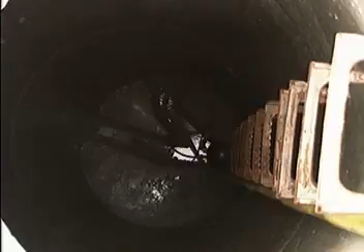Unfortunately, they failed to take the time to safely inflate it. Instead, they used a trailer-mounted 175 CFM 200 psi air compressor, but failed to regulate the air pressure. Manuel was sent into the line and held the plug in place while air was pumped in from above using the unregulated air source. The first inflation didn't stop the sewer flow. Manuel asked for another shot of air. Boom! The plug exploded in his face.

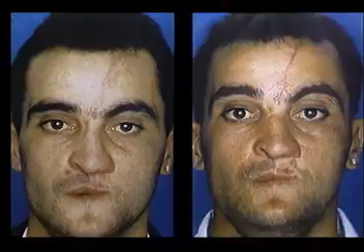Now, the photos you're about to see are graphic, but depict the pain and suffering that can result from misuse of a plug. 13 operations and 8 years later, Manuel's scars are still very prominent. Had Manuel simply used a regulated air source, or better yet, blocked the plug and inflated it from street level using an inflation hose, he never would have been injured. Manuel's life has changed forever. I guess you could say he was one of the lucky ones.

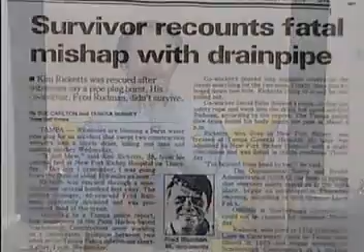He's still alive. Unlike the contractor in Tampa, Florida, who was using two 42-inch plugs to isolate pipe between two retaining ponds. To put the line back in service after the pipe was repaired, the contractor put on a snorkel and dove 3 feet to open the plug's bypass. But the plug deflated and sucked him into the pipe, drowning him. He made the fatal mistake of placing himself in the danger zone while the plug was in use.

These tragic accidents were 100% avoidable. Proper usage and understanding of equipment and job conditions are vital to your safety. Safety should always be your first concern on any job site. During the past decade, our industry has learned that many accidents can be avoided. For example, by properly shoring a trench on a job site or taking the necessary precautions for confined space entry, you can make the workplace safer.

OSHA, the Occupational Safety and Health Administration, and NUCA, the National Utility Contractors Association, have specific guidelines for shoring a ditch, monitoring atmosphere, and using confined space equipment. But what about the safe use of pipe plugs and sewer testing equipment? There are no government or industry regulations in this area. That's why, as an industry leader, Cherne Industries is heading a campaign for greater education, awareness, and safety.

Cherne sets the standard for high-quality, reliable pipe plugs. And although these products are built with safety in mind, they're only as safe as the person using them. In order to practice safe plug usage at all times, it's essential pipe plug users take the time to learn the proper procedures. Workers depend on supervisors to communicate the dangers of using a plug, and on manufacturers to design and produce safe equipment. When renting equipment, it's the responsibility of the distributor to supply defect-free products that are in proper working condition. As you can see, everyone has a hand in maintaining a safe working environment.

Taking advantage of that quality requires end users be prepared when using pipe plugs and testing equipment. Many utility contractors have horror stories about plugs dislodging during a sewer air test, and city workers can cite examples of the consequences of pipe plugs exploding due to overinflation or puncture. It's easy to underestimate the effects of pressure.

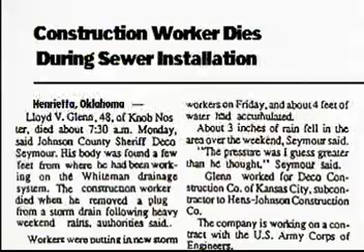That happened in 1995 in Henrietta, Oklahoma, when a contractor conducted an air test on a 42-inch line at 4.5 psi. A simple enough test, yet he tired of waiting for the test pressure to evacuate and entered a 15-foot deep manhole to remove the plug. As he deflated the plug, it dislodged, launching him out of the manhole. He broke his neck and died. Could this have been prevented? Yes. But how do you know what's behind that plug?

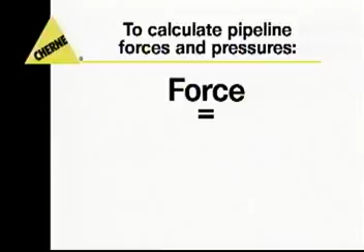Remember that the total force exerted on a pipeline plug is directly proportional to both the pressure and the pipeline area. So even though 4 psi sounds like low pressure, once you define the square inches, the amount of force behind the plug is overwhelming. To better understand the hidden dangers you may be faced with, let's break down what happens when a plug is used to hold back pressure. The formula for calculating pipeline forces and pressures is force equals pipeline area times pressure. Consider the following examples.

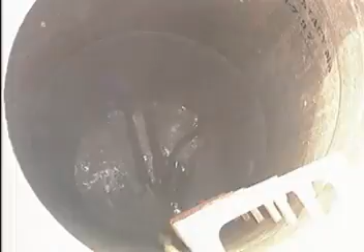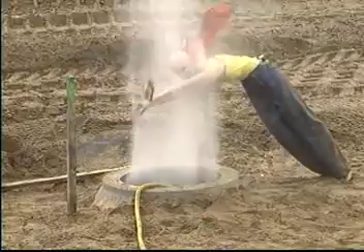An 8-inch plug used in a 4 psi test is subjected to over 200 pounds of force. The same 4 psi test in a 48-inch diameter pipe is restraining over 7,200 pounds of force. Standing in front of a plug during this air test would be like standing in front of a loaded cannon with a lit fuse. A plug deflated before the back pressure is released can cause serious injury and even death.

A plug should never be deflated while back pressure is still in the line. More importantly, a plug should always be deflated remotely using an extension hose. Never, ever deflate a plug within the danger zone. The force of that plug is equivalent to a missile shooting straight at you. When the force of a plug dislodging under back pressure has been known to knock over heavy machinery, it's obvious that you don't stand a chance.

In Arlington, Texas, a contractor was finishing up the installation of 18-inch sewer pipe. To test the line, the contractor followed the sewer air pressure test procedure outlined in ASTM F1417, a 3.5 psi test. The line passed, and all that was left to finish the job was to dismantle the test equipment and remove the test plugs. Unfortunately, a malfunctioning gauge indicated that the test pressure had been exhausted, when in actuality it hadn't. Thinking the back pressure was exhausted, the job foreman sent an inexperienced 18-year-old to remove the back plug.

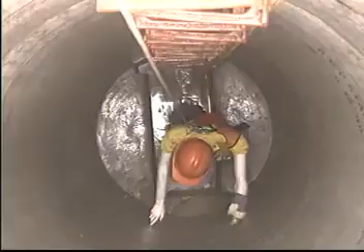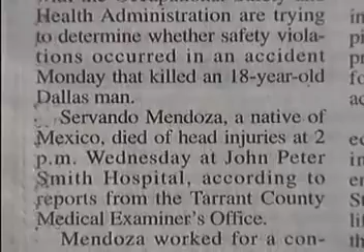But the plug did not have an inflation hose attached. The manhole was shallow, and he climbed down and began deflating the plug. By now, I'm sure you can guess what happened. The plug blasted out of the line and thrust the worker against the manhole. 48 hours later, he was dead, having suffered from fatal head injuries.

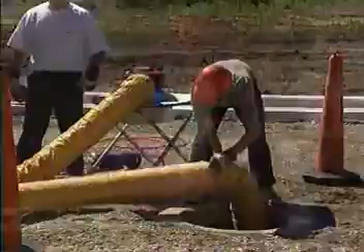If these kinds of accidents are going to be stopped, you are a major part of the equation. Proper use of confined space equipment, remote inflation hoses, regulated air sources, plug blocking devices, and an understanding of inherent hazards can prevent injury and death. Over the past few years, safety in a confined space has been outlined for the industry. Ventilating, monitoring for gases, and using proper confined space entry equipment is critical. Never enter a confined space without knowing that it's safe and using proper confined space equipment.

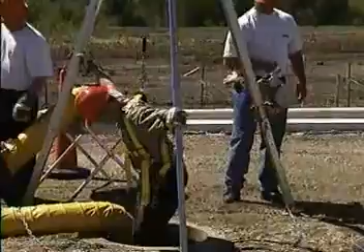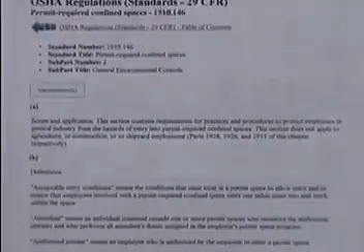OSHA Regulation 29 CFR 1910.146 covers safe procedures for confined space entry. It requires that a competent, trained person be responsible for making sure that all workers on the job site comply with these regulations, as well as completing and posting the confined space permit. Following these regulations can save your life.

In the 1980s in Brownsville, Texas, several workers found out that what you can't see and smell can kill you. While working without confined space equipment, a sewer worker deflated a pipe plug in a wet well, and methane gas entered the well. The worker was overcome. A second worker entered the well to get his partner, and unaware of the deadly atmosphere, passed out. The job foreman then entered the structure, also succumbing to the gas. They were all removed from the wet well. 2 died, 1 suffered permanent brain damage.

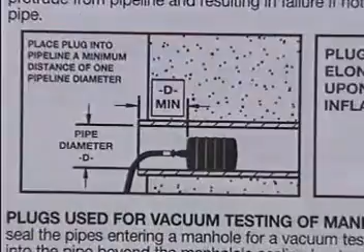In this case, injury was not a result of plug misuse, but rather a disregard for following OSHA confined space procedures. Since the 1980s, the industry has gotten smarter about confined space procedure, but lives are only saved if the procedures are followed. Whether you're using a plug to block flow for maintenance or testing a new line, please remember to consult OSHA confined space regulations, Cherne's safety instruction manual, and any ASTM specifications for guidelines and regulations regarding your specific job.

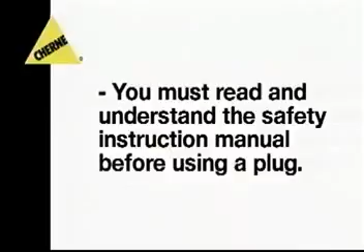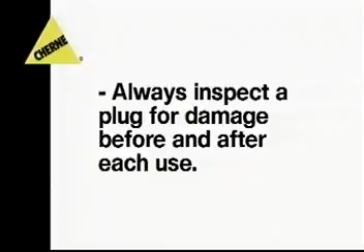Remember, death or serious bodily injury can happen if a plug fails for any reason. You must read and understand the safety instruction manual before using a plug. You must wear safety glasses and a hard hat. Never, never, ever enter the danger zone when a plug is in use. Always inspect a plug for damage before and after each use. Never use a plug in a pipe size different from the recommended usage range.

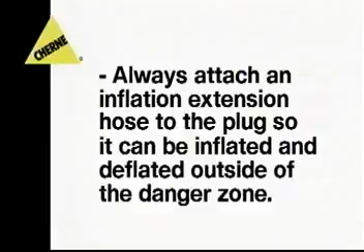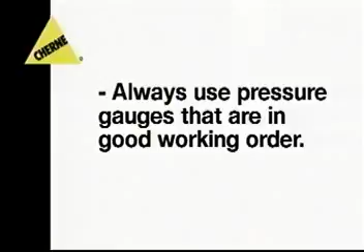Always attach an inflation extension hose to the plug so it can be inflated and deflated outside of the danger zone. Always inflate the plug to the proper pressure. Always use pressure gauges that are in good working order. Never exceed recommended maximum allowable back pressures. Always make sure back pressure has been released before deflating the plug.

Following these simple steps and taking the time to do the procedure correctly can make the difference between life and death. Make sure that you and everyone on your crew are familiar with the hazards as well as the preventive measures necessary when working with pipe plugs. It's well worth your time.